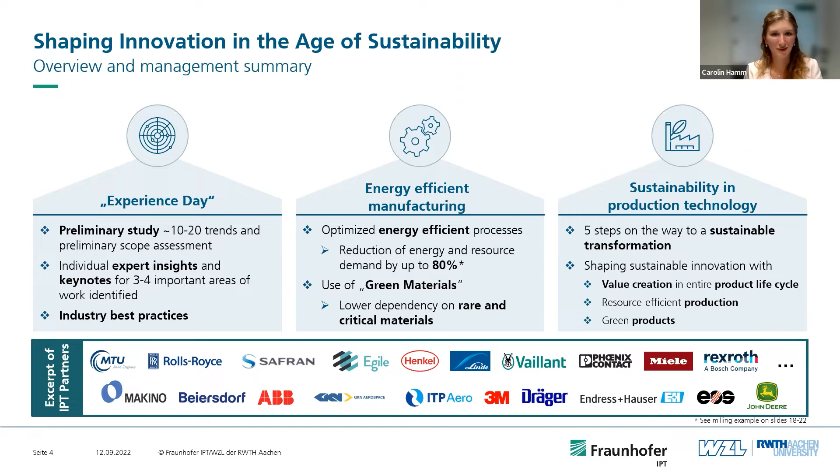So let's start with the Experience Day. In general, there are 3 big benefits you get out of this Experience Day.

We already did this with different companies. It's a very structured process with methodical training, so our experts will guide you through the process and give their insights. So you have a very big expertise, a very high level of expertise from people from the outside.

And third, it's about best practice sharing. You will be able to know about best practices, which gives you the opportunity to react and move very efficiently afterwards. So how are we going to do this?

The first step is the Experience Day preparation, where we especially get to know the goals you want to achieve. We kick off with a web conference to get to know the fields of interest important for you, and with this knowledge we structure the topics, prepare information, and identify possible fields of interest or trends for you. We give you a common understanding of the current situation, maybe of different markets, future challenges, and possible strategic options.

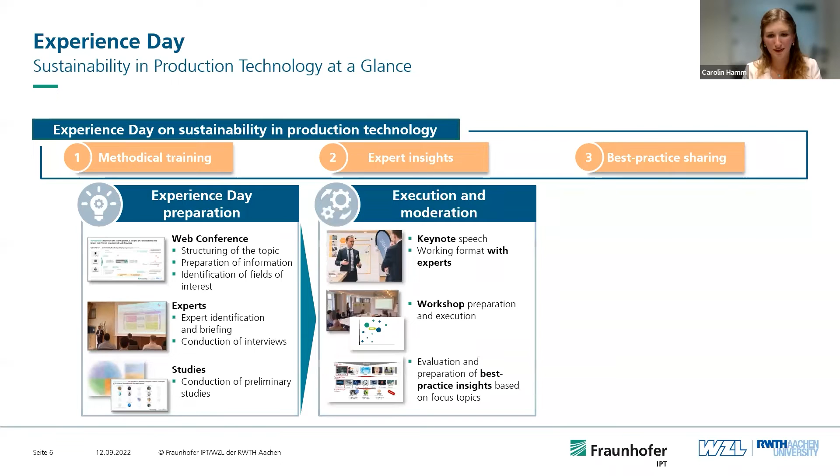After a joint meeting, which is generally an online meeting, you can select about 3 to 4 top or key issues you want to focus on. Then we meet in person at the Experience Day itself and bring in experts with more detailed knowledge in these fields.

So, after the Experience Day... what we do on the Experience Day itself: in the beginning, you get insights set by keynotes in fields such as sustainability, green growth, energy efficiency, or fields interesting for diversification.

Then you get very dedicated insights into state-of-the-art technologies and applications from our keynote speakers as well as industry experts we invite for the day. After this first part, we have very technical and educated workshops together, maybe using a method like World Cafe. This includes interactive presentations from experts in detailed fields of technology, followed by a joint discussion in the group with your company members.

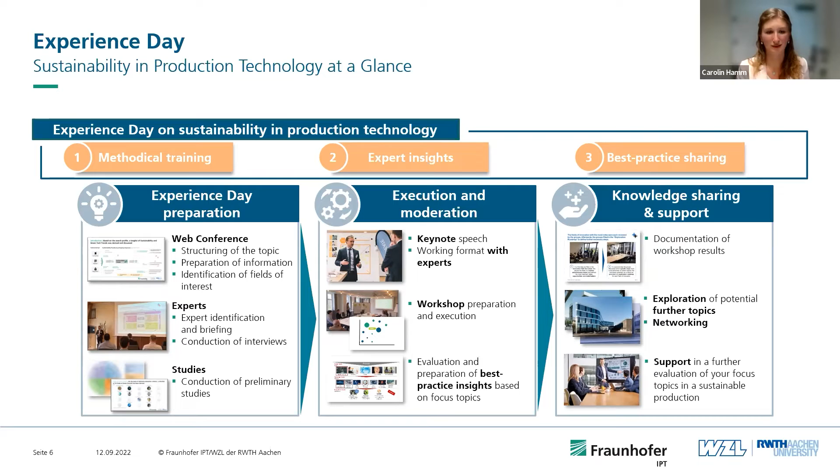And of course, in the end, we will make an aggregation of the workshop results. Then after the workshop, it's all about knowledge sharing and supporting you to bring this further. So you will get the documentation of the workshop results with pre-assessed fields of action for your individual strategic options, and this serves as a basis for new and validated business opportunities.

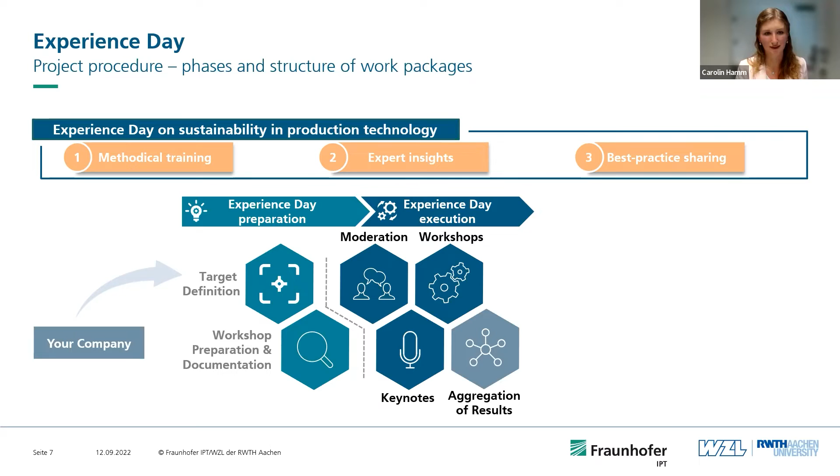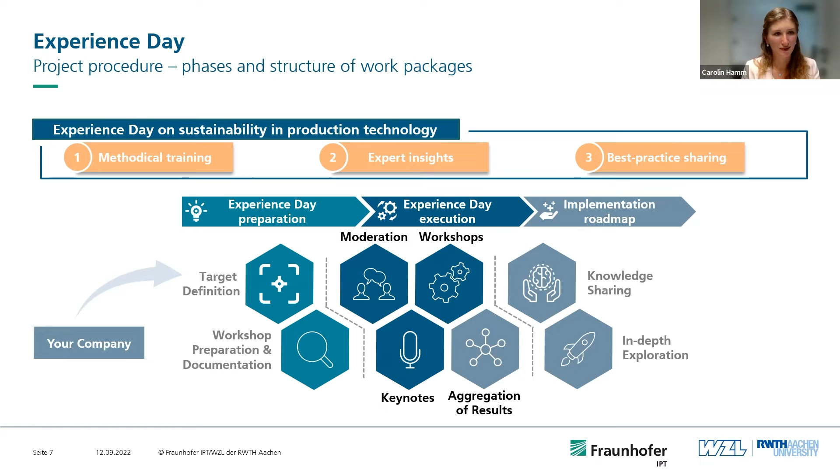To sum it up very briefly in some modules: it's all about your company's targets that you define. We do the workshop preparation as the first step, then the experience day execution, then we focus on the moderation of the workshops. We search for interesting keynote speakers and make an aggregation of the results. Then the next step is all about implementation, where we would like to share the knowledge and make a more in-depth exploration.

So this was a glimpse of the experience day. So I would like to hand over to Kilian for the second part, the energy efficient manufacturing of turbo machinery parts.

Yeah, thank you very much, Carolin. It's a literal handover, actually, as you're right across from me here. So happy to be with you guys here. Good morning to everyone in the US.

Kilian Frickel here. So as introduced, I have a strong focus on the technical aspects when it comes to the quantification of sustainability and efficient manufacturing processes.

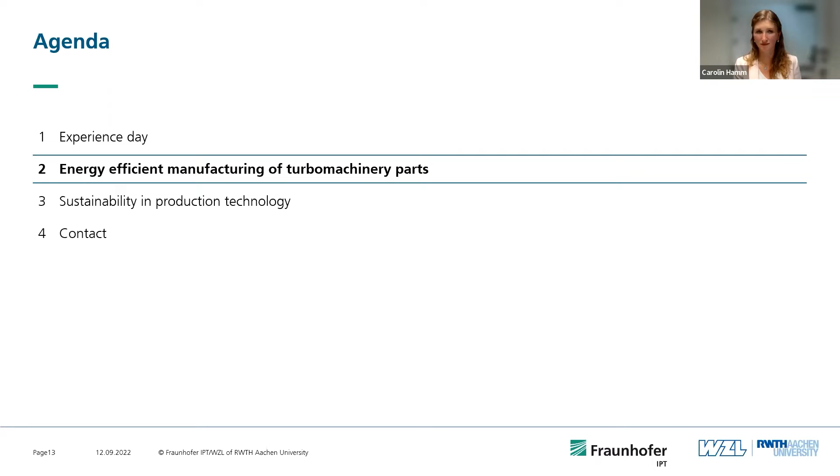In this subchapter, I will just give a quick glimpse into one of our main projects that we're working on in terms of sustainability and ecological footprint calculations, with a very specific or precise example when it comes to the manufacturing of turbo machinery parts. But before we dive into the actual methodology that we use, let's look at the motivation behind this initiative and project.

The project I'm working on is called the Clean Sky project, and especially in the past few years, awareness has grown, especially among European countries or in the European Union, when it comes to the ecological and sustainability goals that have been set not only by the EU but also by the UN. Looking at the aviation industry as a specific example, you can see that the revenue passenger kilometers have increased exponentially over the past few years, apart from the dip in 2020, 2021 because of COVID. But experts say this will recover in the next few years and we'll be back on track.

And despite the increase in revenue passenger kilometers, the targets set, especially in the Flightpath 2050 documents, say we need to reduce emissions during flight per passenger kilometer. But above that, there's not only a focus on the CO2 footprint or what we consume on kerosene and oil. So how can we actually approach different aspects when it comes to sustainability? Because it's not only the use phase within a product's life cycle, it's much more than that. When we talk about sustainability, we could potentially quantify the monetary aspects by saying something is more expensive or cheaper than something else. This is a very classic approach, sticking to the classic triangle of cost, quality, and time, trying to optimize this and being sustainable from this perspective.

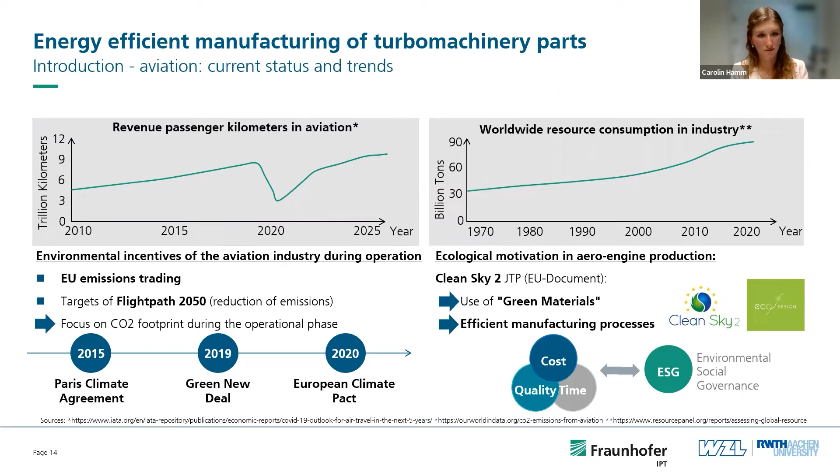In this very particular example, as I said, the Clean Sky Initiative has a strong focus on the aviation industry. We here at IPT have a strong focus on the manufacturing of aero engine components, like the blisk, for example - a good example which is a rotor from the engine's compressor.

I won't get into technical detail about what it actually does, but it's a highly complex component comprised of a highly complex alloy that's difficult to machine.

So, a perfect example to see how different the process chain scenarios can look for manufacturing these components, and then looking at the hotspot analysis to identify where we can decrease the influence on our environment, but also the costs. This is the example I brought with me today.

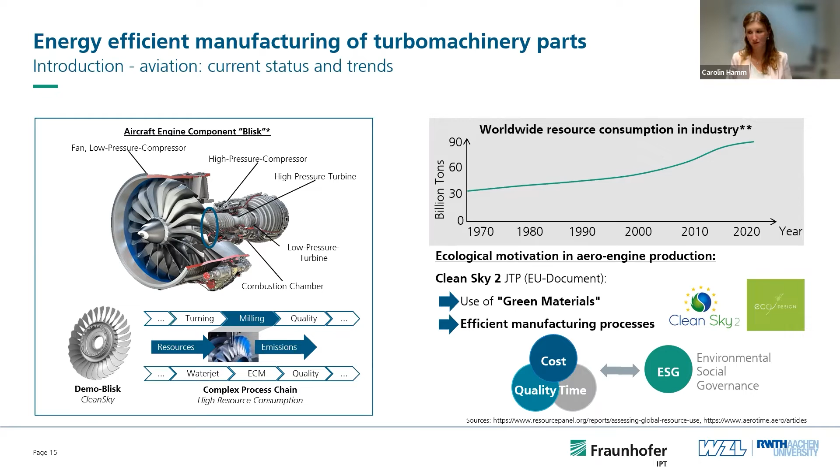So, looking at different manufacturing processes and process chains for these aero engine components, more specifically the engine rotors. If we look at this aero engine rotor, we can see it's a highly complex component with filigree blades that are manufactured all in one piece—you don't manufacture the disc and then attach the different blades to it.

It's all made out of one large raw part, and then built and turned subsequently in the different manufacturing processes. Our first step when we want to quantify the economic footprint and costs is looking at the overall process chain that lies in front of us.

We start off with the raw material that we use. There's a section within the product's life cycle where we start with raw material extraction—where do we actually get the different alloys from? This is an example for a titanium disc, so we have titanium, but also aluminum and vanadium in our alloy. And how do we actually generate or produce the raw parts?

That's the first step, starting at the very beginning: what are the different processes that lead to the creation of the raw part of our product? We list it into different sub-processes, like casting and forging processes, treatment processes, and we quantify the input and output flows in the first step. This is called a life cycle inventory, quantifying the amount of energy, electricity, compressed air, resources, and so on.

We move through all the stages of the production, from the turning processes up to milling and ending with maybe coating and measurement processes. Really breaking it down to the specific individual processes, and then quantifying the input and output flows we have. Once we've done this, we compare the different processes and break it down to the particular processes with the highest impact.

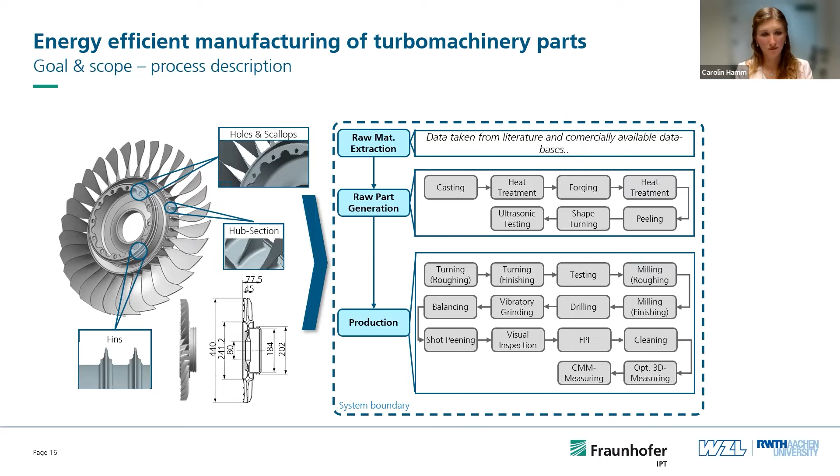In this case, when we look at the blisk—a difficult to machine component—but you can easily transfer these results to other parts, not only of an aircraft engine, but also different industries. This approach, known as a life cycle assessment approach, is always identical. So what we did was look at the energy consumed during the individual manufacturing processes.

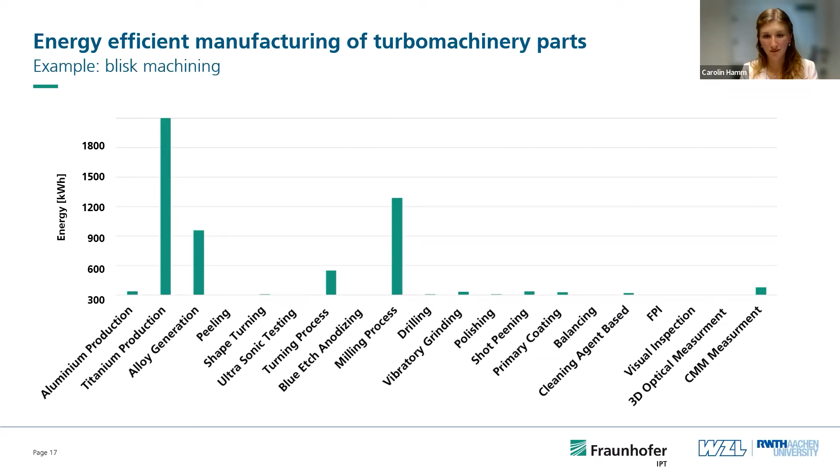From left to right, you can see the same process chain I described before. What's very obvious when we look at the amount of energy consumed during the different stages is that we have a high amount of energy and resources—not even shown on the slide—consumed during raw part shaping and raw part production. The gathering of raw materials such as titanium and aluminum, and the alloy generation, really consumes a high amount of energy.

This brings us to the points of maybe increasing the use of additive manufacturing, recycling scenarios—because if you increase the recycling rate, the amount of resources needed for primary production of raw material decreases—and then also the use of green materials. What does this mean? I'll get to this in one of the following slides.

The other part, as you can see with these bar charts, is that the turning and milling processes stand out—the central shaping processes of my component. Now, after this first hotspot analysis, we can get into the deep dive and see how we can optimize these manufacturing processes and approach the problem with the raw material that we need.

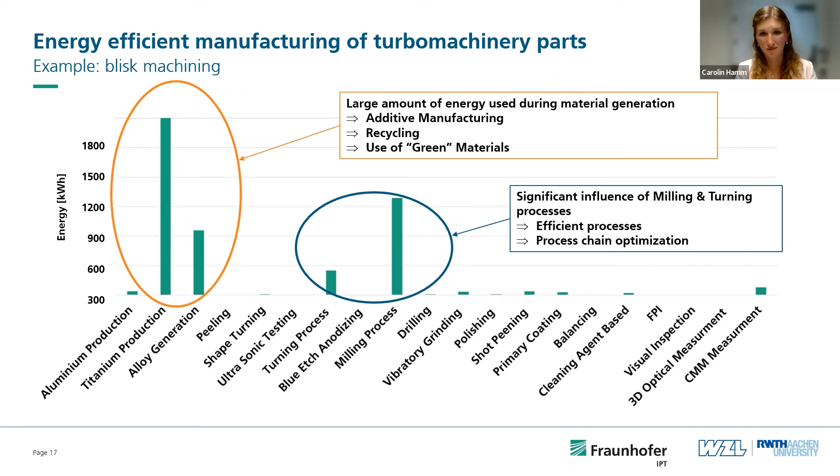There's actually a linear relation between the CO2 footprint and the energy demand of these raw materials, needed to generate 1 kilogram of material. If you compare iron, for example, it's nearly 0 kilogram of CO2 equivalent, because nowadays these processes have been optimized and it's quick and fast to manufacture, compared to molybdenum, which is part of different alloys or nickel-based alloys, and also titanium. They have a higher ecological footprint, often measured in CO2 footprint, but also energy demand.

This is where we look at different alternatives of alloys and raw materials that could potentially loosen or lessen the impact we have before we even start production, because this is the rucksack that these raw materials bring with them before we even start production, from a sustainability standpoint.

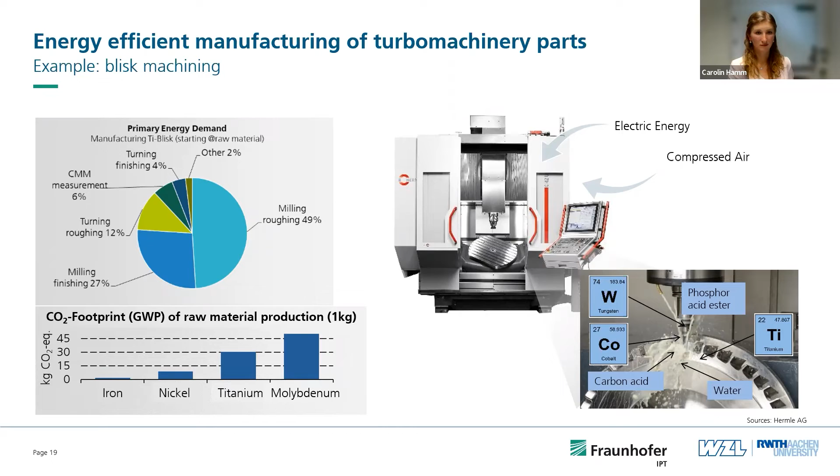I don't want to get into a lot of details, but looking at these countries, it's not only an ecological problem we could face in the next years and decades to come, but also a socio-economic or even political level that these demands and supplies can reach. The resources come from all around the world, and if we rely too much on materials from countries that are politically unstable or socioeconomically critical, this can lead to a lot of problems.

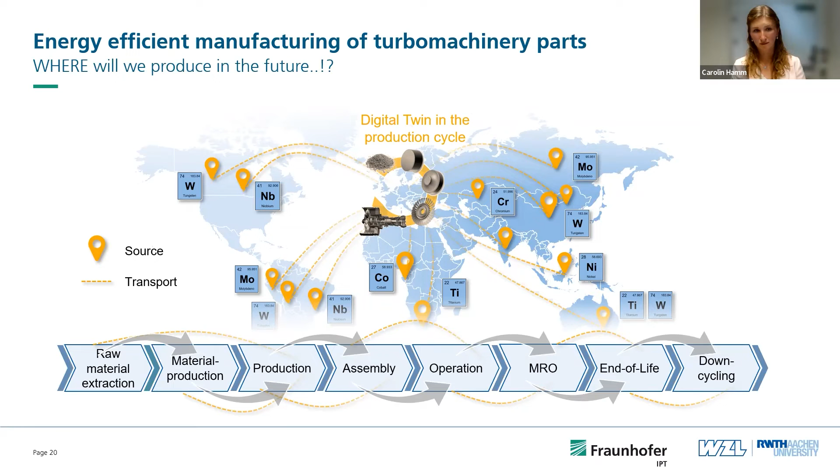This is also a large part of sustainability. It's not only about the monetary aspects. And speaking of that, we have monetary aspects of course, we have social, socio-economic aspects that are important, political and governance aspects, but also ecological aspects. And how do we quantify the ecological footprint of a product, for example?

This is where life cycle assessment comes into play. This is a methodology that gives us the opportunity, after quantifying the input and output flows of resources and energies, to recalculate these flows - the elementary flows - into specific equivalents. What do we exchange with our environment? The most famous one at the minute is the CO2 equivalent, because it's the basis of calculating the global warming potential that we have with the life cycle or use of different processes, materials, and products that we create.

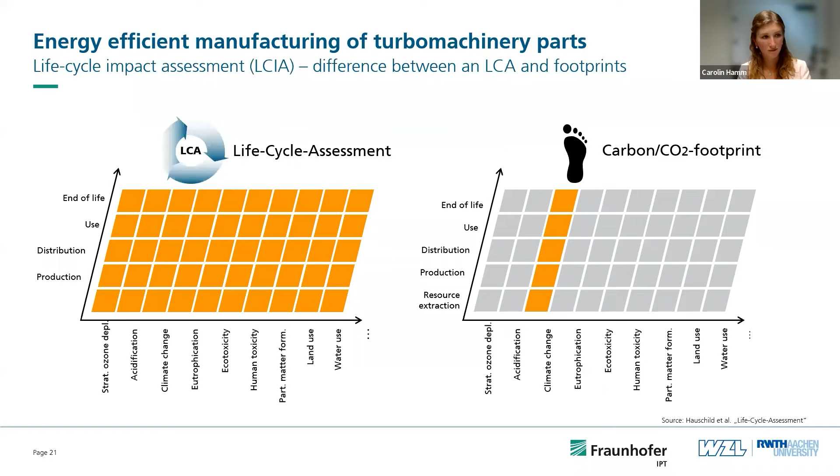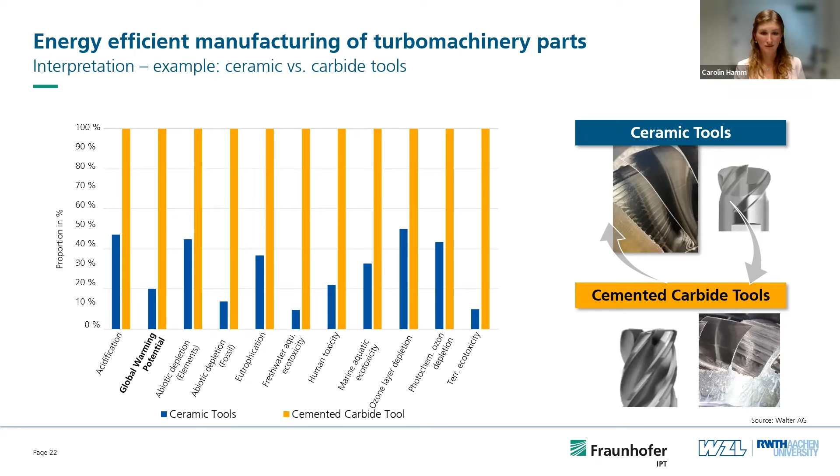So this is a quick overview of what we do. We analyze processes and product flows based on improving the efficiency of processes, the use of green materials, take socioeconomic aspects into account, and perform a life cycle assessment to calculate the ecological footprints that we leave behind. And with that, I would like to hand it back to Carolin for the third part.

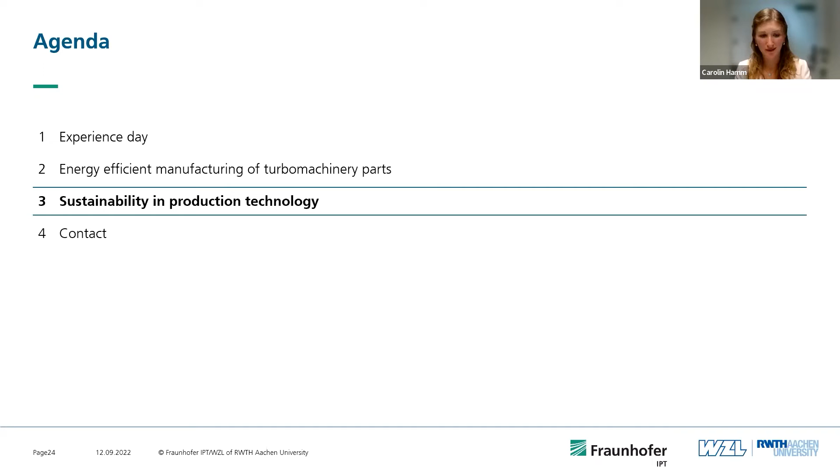Okay, thank you, Kilian. So as the last part of our short presentation, I want to tell you a little bit about sustainability in production technology, as an overview of the Fraunhofer IPT and in what fields we are working on. So as mentioned in the beginning...

At Fraunhofer IPT, we are working with different companies which have very different starting points for sustainable transformation, or that are interested in the topic of sustainability. In general, we have 5 big steps, and we of course support the points that are the biggest pain points for our customers. To give you an idea, I will show you now our fields of action.

So first is about understanding the challenges. Based on these individual challenges and existing tensions, we can start developing a target image. With this target image, we start creating the strategic position of where you want to go in the future, and what's your company's vision. That can be, for example, a digitalization strategy, to get your production more digital or things like that.

Then the third step is to identify your relevant fields of action, and get the knowledge in these fields to ensure that the target you set can be reached in the future. So that's about products, processes, or business models. There we are very free, we have experts in all fields working on these topics, for example business model validation, technology concepts and planning, things in this area.

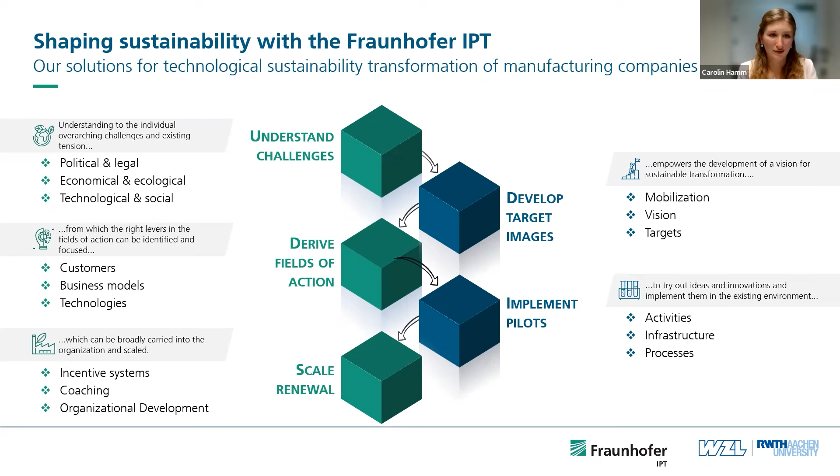And then after this step, we are more focused on scaling up. So then it's about spreading the vision and alternative actions. After successful piloting, we accompany the industrialization and the scaling, which is a very essential level for creating green value and exploiting the potential out of it. So in all fields, we have expertise, and we've already done several projects to support an end-to-end transformation.

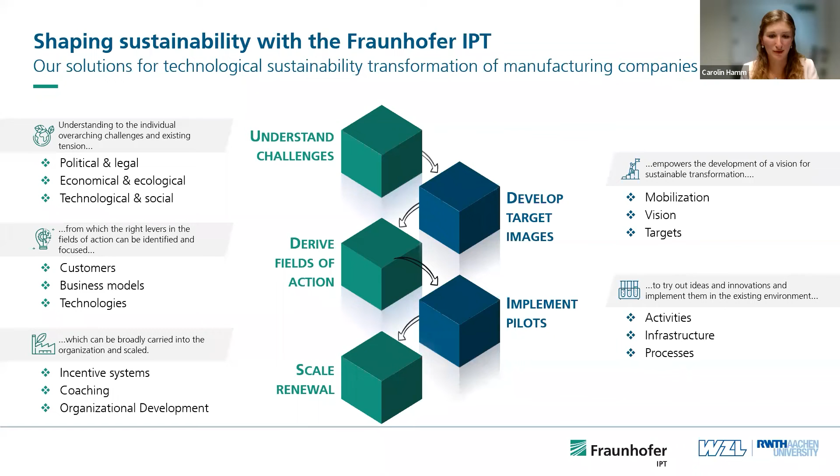And to give you a better imagination of what kind of projects these may look like, you already got to know two of them. I want to give you a brief overview. We can base it on 3 different pillars. The first one is about sustainable value creation, which considers the entire product life cycle, from design, production, logistics, and recycling.

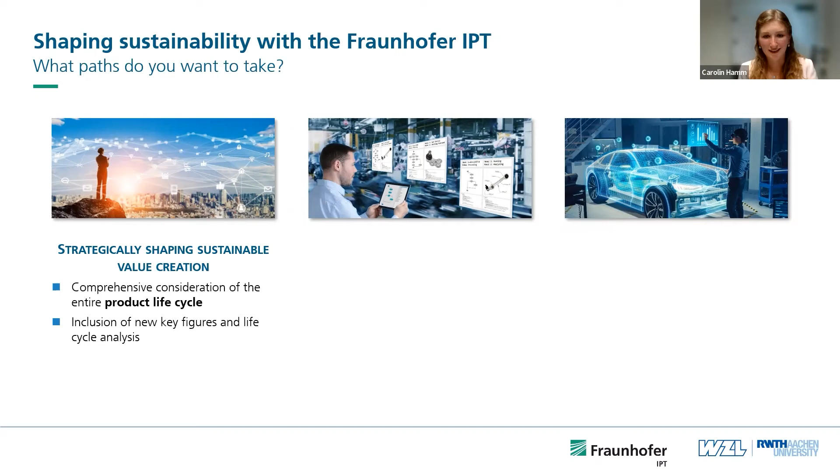This is about the evaluation of meaningful key figures and actual costs of your production. With this knowledge, you create transparency, you gain resilience, and it generally improves your competitiveness. So the second pillar, then we are focusing on resource savings in manufacturing, in processes, and the complete process chain.

This is about making data in production processes accessible for analysis, which is not always there in every company. It's about creating a basis for weighting alternative production technologies, aiming to reduce material and energy consumption, which results in lower cost, or replacing harmful materials with more environmentally friendly ones.

The third pillar is about environmentally friendly products. Our point of view is that products are sustainable if they can be manufactured and repaired using fewer resources, and are energy saving or have low emissions in the application. So that's the field we are looking at in this pillar.

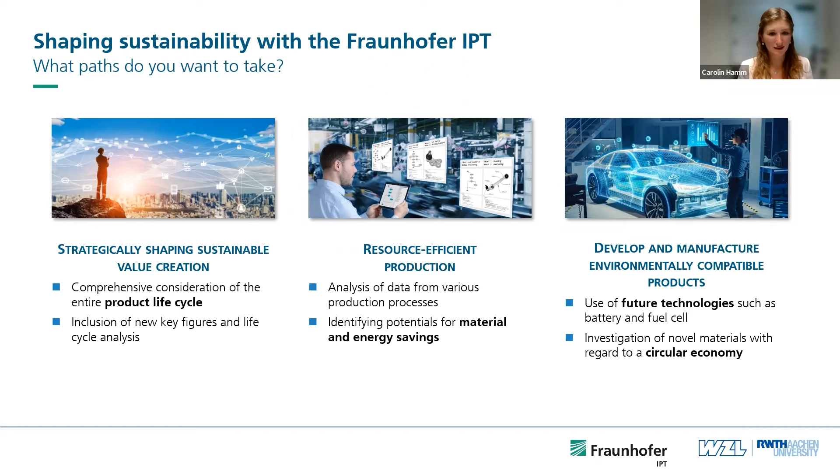In the following, I will drill down the field and show some examples, just a brief overview to give you a glimpse. First, for sustainable value creation, some examples for key figures and life cycle analysis - getting transparency about the impact of manufacturing steps on the life cycle assessment, which you already got to know from Kilian. Then it's about dealing with key figures and economic analysis.

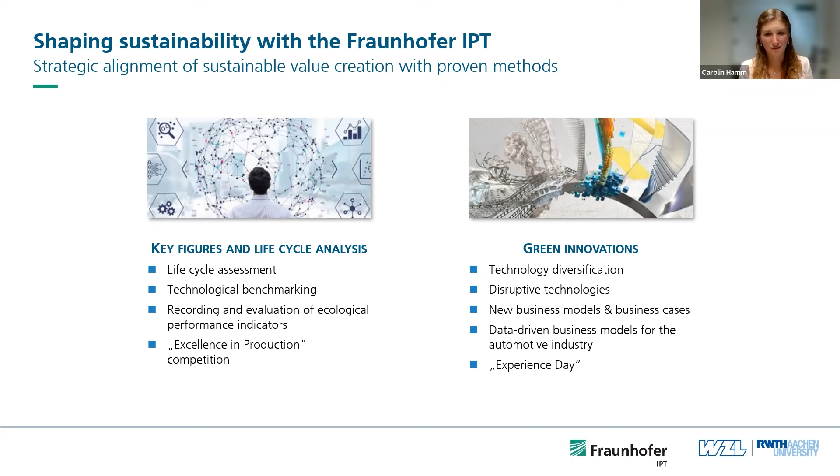Then we have another field in the first pillar, that's green innovations - for example, technological diversification, the expansion of the existing service program of your company to new products and new markets, using something like the Experience Day, and working on disruptive technologies. There we are supporting the identification of future customer needs, or analysis of competences for supply and demand.

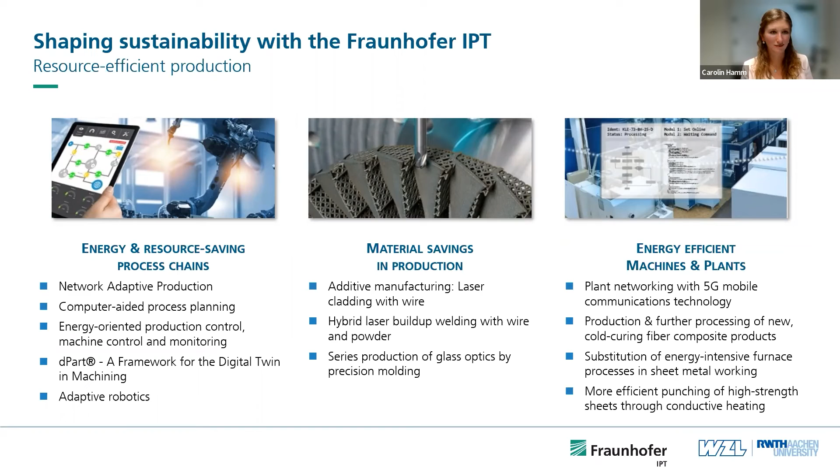So this is just to give you a very small overview of all the projects we are working on in 4 different departments at our institute. For drill down of more details of all the projects, you are invited to contact me, otherwise we would use the complete day for having a look at all these projects. Thank you very much, and we are happy to answer some questions if you have some.

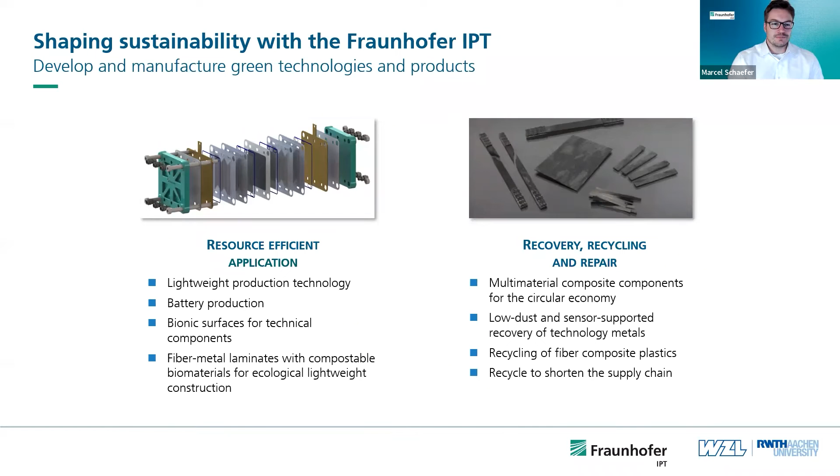Thank you, Caro. Thank you, Kilian. Very interesting topic, and I guess we got a glimpse of a small amount of what you actually do. I know there's much work to do, but also a lot that you have already achieved within Fraunhofer IPT. I want to open the stage now for any questions that the attendees might have. I don't see any questions in the chat, so if you have written them down, now's the time to ask the experts about what you have just heard, or in general about the topic. That's not the case. Typically, it's me to kick off the question sessions, and I do have a lot.

Top several questions. So where to start? Kilian, yes. I like that you pointed out that in today's world, sustainability is not only the carbon or CO2 footprint, but that it goes much broader. Then you showed the life cycle assessment. So can that be transferred to other areas? Can we transfer this to South Carolina? Can South Carolina-based companies order this assessment, or parts of it that are of importance? Maybe they don't want the whole thing because regulations here in this field are still to come, I would say. The question is, how can we benefit here from these things? Is that something you can offer? Yes, absolutely. So thank you for the question, first of all.